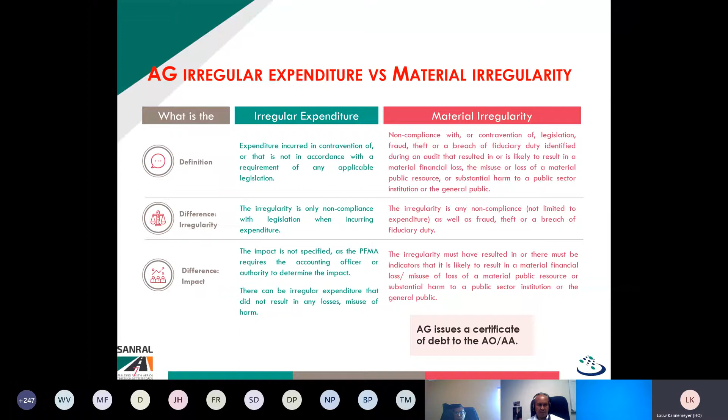If one looks at the Auditor General's report on material irregularities, these are on audits done in 2018-19. We don't have the update for 19-20 because the audit period's been moved out by 2 months. If you look at here what the Auditor General regarded as material irregularities, remember this is now where they are going to be issuing a certificate of debt where money needs to be collected from someone.

So just to show everyone what they regard as material irregularity, if you look here at the nature of material irregularities, of these 28 material irregularities that they identified as Auditor General, 11 of the 28 was overpricing of goods and services procured. So if they decide that the price that was paid for goods and services was above the market rates as they may determine at the time, they regard it as material irregularity, because they say you should not have made an award if things were overpriced. And I think you see a lot of that with regard to the PPEs in the news.

Secondly, another reason, according to them, for material irregularity is unfair procurement processes resulting in a supplier appointed that did not deliver. So if you appoint a service provider and he in the end is not capable of delivering, they do regard that as a material irregularity.

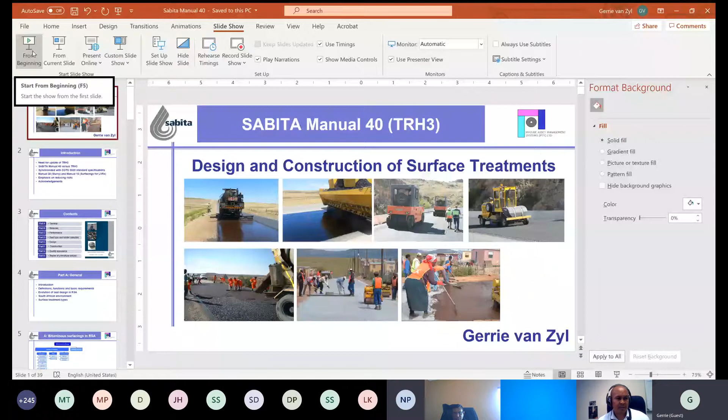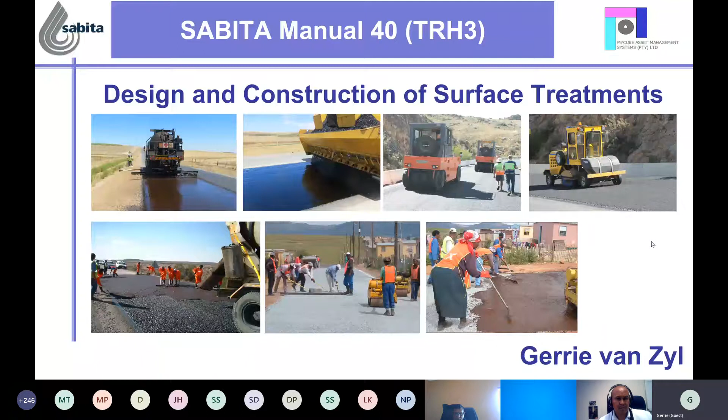This is about Sabita Manual 40. Not replacing TRH3, but one can almost say so. There was really a need to update the TRH3 2007. It's 13 years old, and a lot of things happened in between. So Sabita came to the rescue and decided they're going to sponsor that. What I can say, it's synchronized with COTO 2020. The standard specifications incorporated in this document are Manual 28, the slurry, and Manual 10, surfacings for low volume roads. And the emphasis is really on reducing the risks.

And can I acknowledge Sabita for sponsoring this, but also all the people who actually contributed, and really good criticism, and it made the document a lot better. It was ready, but a meeting a week or two ago decided that we need a little bit extra on the PG binders. So I'm just going to run through the contents and then highlight a couple of things. It's now divided into 8 parts: general, materials, performance, seal type and binder selection, design, construction, quality assurance, and the repair of premature failures.

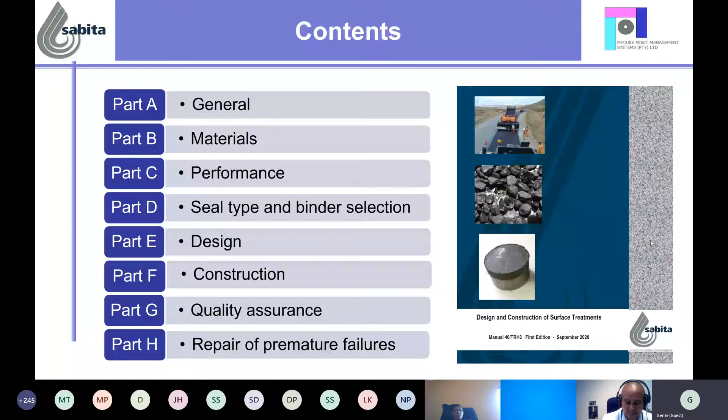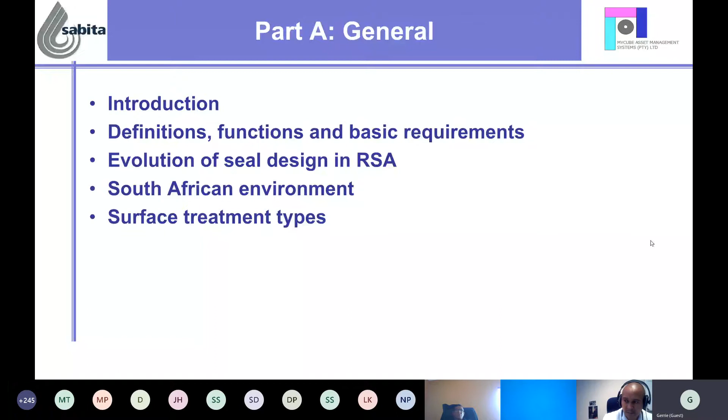Just highlighting then Part A: definitions, the functions, the evolution of seal design in South Africa, our environment, and the different surface types. So we're talking about surface treatment here, not the asphalt side, and sprayed seals, slurry, and combination seals like the Cape seal and the slurry-bound Macadam seal. The graded aggregate seals, like the Otta seals, are also dealt with in this document.

In the definitions, we look at skid resistance, the macro texture, micro texture, road noise, typical values for different seal types, and, let's say, investigatory levels of when you need to do something. This is just about where things came from in South Africa.

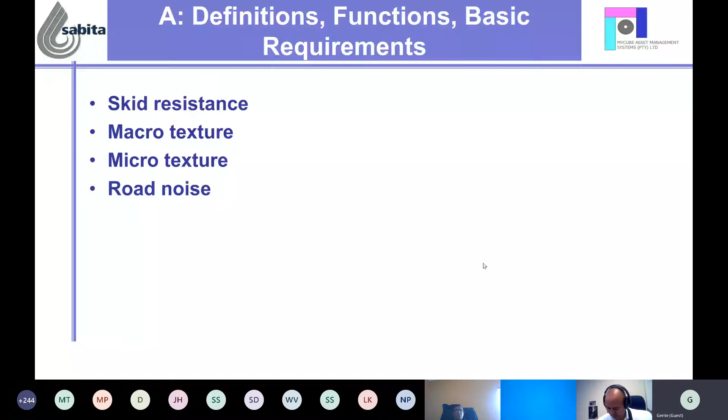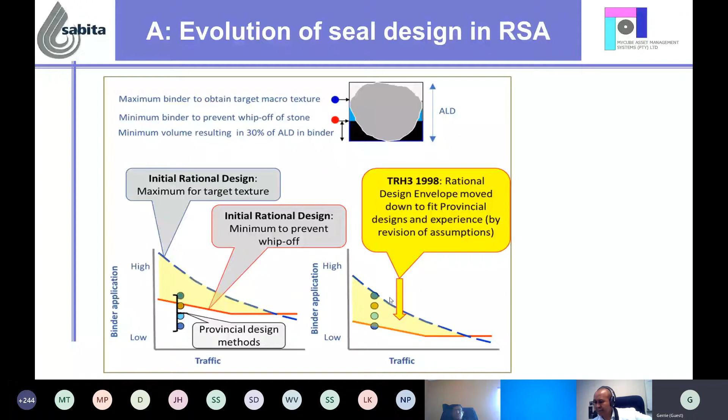Quick view on that. The initial designs from different road authorities in South Africa, actually everybody believed they were right, and then the rational design came up, and it provided too high answers, too high application rates. So in 1998, what we did was to change the assumptions of the rational design method to move this whole envelope over so that all the road authorities should more or less get the same answers and be happy with it.

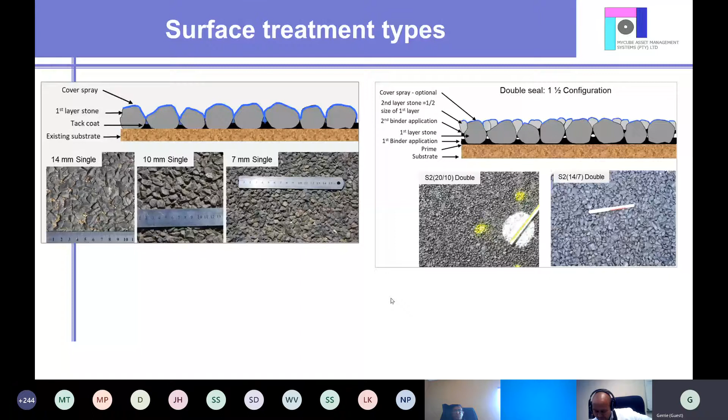Just highlighted the different seal types that we're looking at: grit seals, double sand seals, Otta seals. On the right hand side, the graded aggregate seals, single seals, double seals with different configurations, 1.5 and 1 1/3, and so forth. And every seal type's got a place in our industry. There's the Cape seal, slurry-bound Macadam seals. So all of them are dealt with in this document.

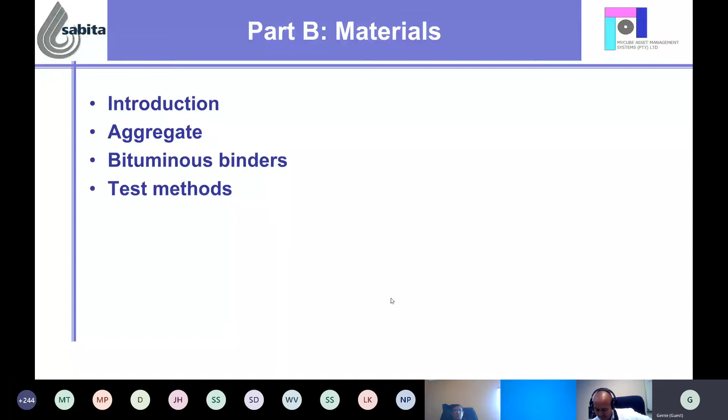On the material side, it's really digging into the depth of the aggregate and specifications and what we really want, the bitumen binders and test methods. Just to highlight here that in line with the new COTO specifications, there are three categories of materials, and it's not specified for the different traffic volumes, but one can reduce certain standards when you deal with lower traffic volumes.

And that's not thumbsuck, it came from a lot of research and from other organizations and countries over the world. So there's some reduction in the standards so that you can use materials locally available for specific purposes. On the binder side, we stick to SANS 4001 and the TG1 document for the modified binders, but we also need to move to the PG binder specifications.

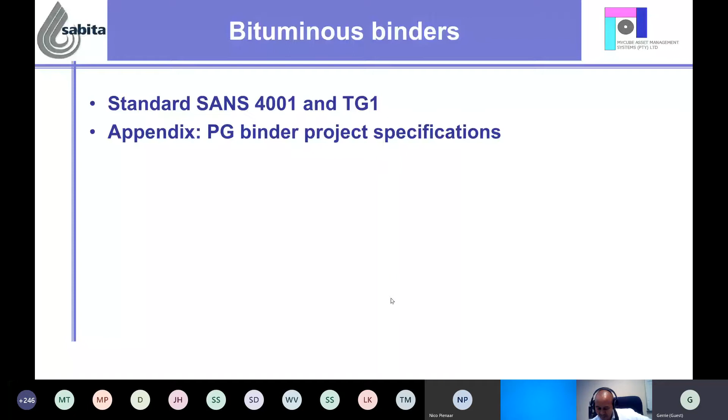We had a meeting two weeks ago, almost launched the Sabita Manual 40, and then it was decided that we need to bring in the PG binder project specifications. Not completely blind specifications, let's say half blind, because with Stephen Renon's assistance, we'll add project specifications so that there's a PG binder specification, but on top of that, for a bitumen rubber, for example, you will still specify bitumen rubber with the properties of the material you want to use in this binder.

Part C, performance, quite an important one, dealing with how different factors influence seal performance: the pavement structure, the traffic, the geometry, design, aggregate, and so forth. All those are quite important to understand, to select the seal type and the binder type, to do the right design, and how you actually construct for good performance.

Just some highlights to understand the effect of moisture in terms of performance. Moisture just underneath the seal layer can actually change the deflection bowl completely. If you have a very soft layer just under the seal, and when it's wet, you will have a very short radius of curvature, and that will make the seal crack immediately. And if that base can dry out, then you have a very large radius of curvature, which means that seal can last very long.

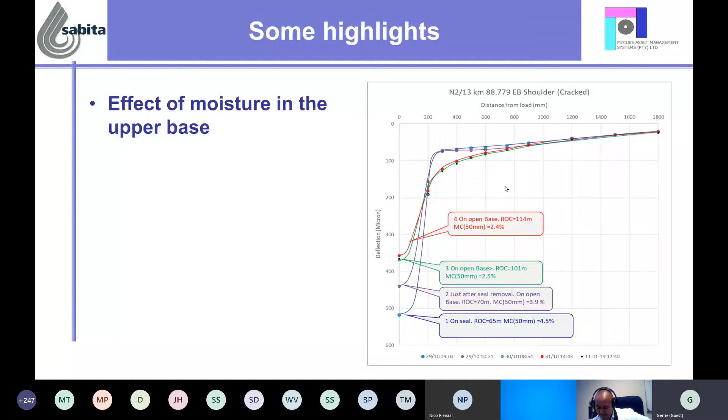That's also in line with other documentation. But what it ties into is our specifications in terms of drying out a base layer before we seal, and it all starts to make sense. Other highlights: we've had several investigations of seal failures, and one of the main reasons was, in fact, too coarse base textures, the G1 and G2 crushed stone materials.

And as you can see here, the base layer, the large aggregate, actually protrudes, and it's right at the surface, something like that, and at the bottom is the result of that, with moisture penetration into it and stripping of the seal. So we had never really had good specifications. There are now new guidelines for maximum existing textures allowed before you must put a texture treatment on, just to make sure that the seal performs well.

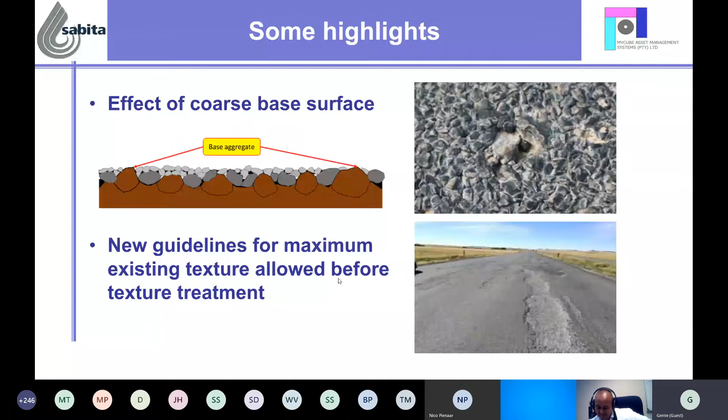Effect of rejuvenators. Research work shows that if you apply a rejuvenator, like our inverted cutback emulsions, or even an anionic stable grade diluted emulsion, you can extend the surface life for up to 4 years. And there's a CRT, a crack retardation factor, that you can use in the HDM-4 modeling and performance.

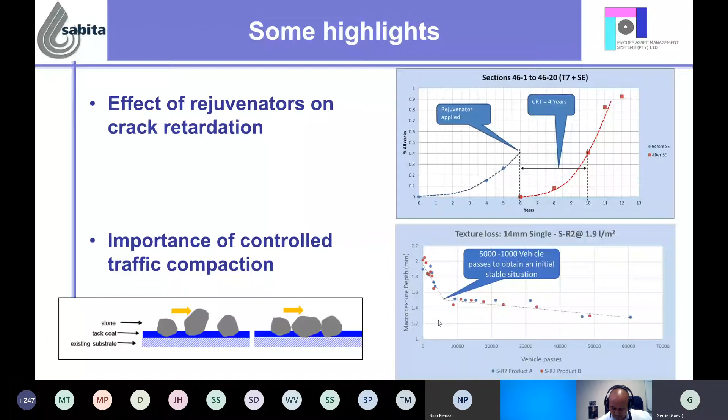Just part D then, seal and binder selection. Different aspects are covered in this chapter. There are specific guidelines for inexperienced contractors, temporary surfacing, sealing through winter, labor enhanced construction, small airports, game parks, forestry roads, footways, and so on.

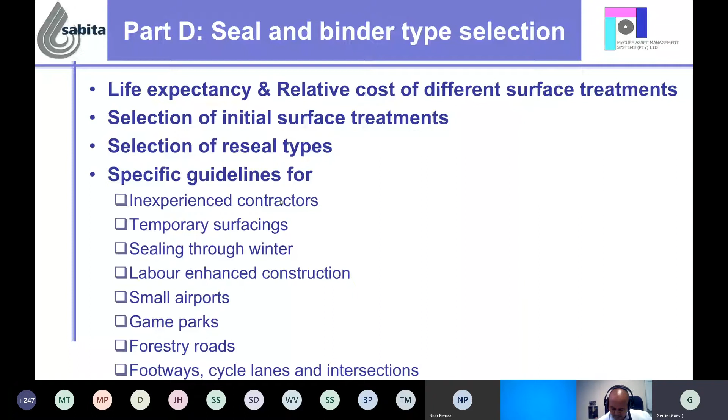And highlighting certain things like the timing of when you must seal. Often we need to identify it at an early stage, so we do the work at the right time, because we still need time to program a budget, award the tenders and get onto site. And what's the implication if we don't do it in time? It can cost up to 18 times the cost of sealing at the right time; it takes a nosedive and we end up rehabilitating the road.

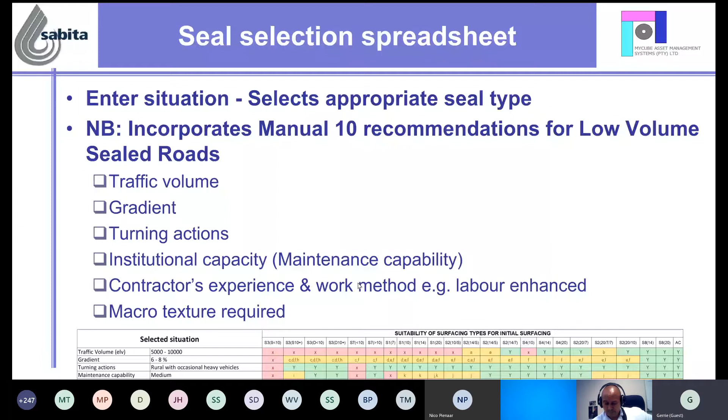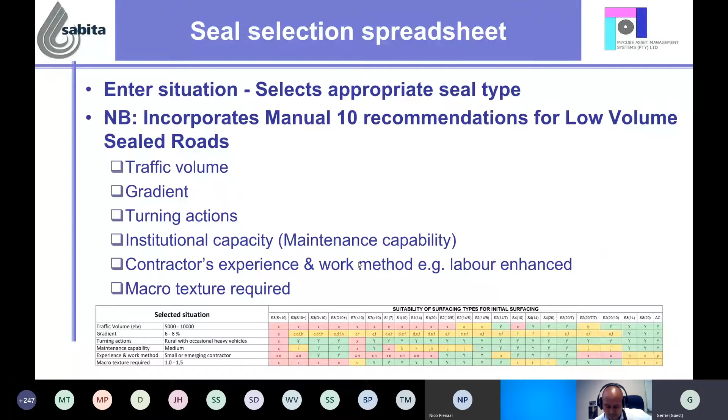For seal selection, there's a spreadsheet available to download where you enter your own situation. It incorporates all the recommendations and studies we've done for Sabita Manual 12 and Manual 10. You enter your traffic volume, gradients, turning actions, whether there's maintenance capability within the organization, the contractor's experience, whether you must do labor enhanced work, and the macro texture, and at the end it will give you guidance with a lot of extras on what to be careful of and what can work in specific situations.

And what I want to highlight here is perhaps, Mr. Chairman, that one should consider for some of the next RPFs looking at low volume sealed roads and the importance of that, and where are the pitfalls and what we must do. We have many experiences and situations already in South Africa where it was done. Excellent work.

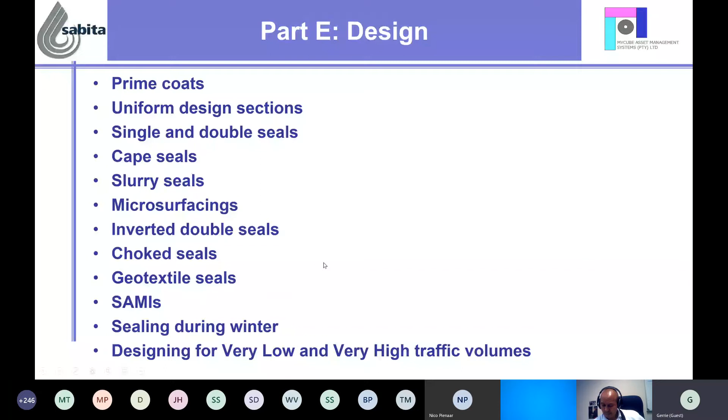When we get to Part E, design, we look at several different situations and the particular type of seal design for every one of these different types of seal and guidelines regarding that. And particularly where people make errors in interpretation of test results, like the ball penetration testing. Laboratories go out, they do the ball penetration testing, they come back and people just plug those values in.

And one must be very careful of what is really happening. What are you really testing? Is the stone that you're going to put on top going to penetrate or not? And how do you deal with the existing macro texture? You actually need to take that into account. There are a lot of extra guidelines available now to say, will the stone bridge, or will it actually fall in between, and how much extra binder must I spray for that?

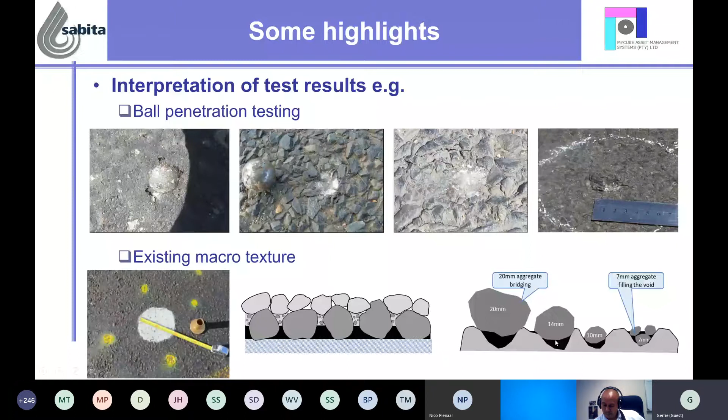Then the designs are now completely based on volumetric design. No more graphs that you have to read off, and all the principles of filling the voids are in there, making provision also for those softer stones that will have more wear. All the calculations are in the document, and there are tables where you can check if your little spreadsheet is actually working well. Plus practical warnings for different situations.

If the substrate is too soft, then the stone will penetrate too much. And if you put too much binder in, the binder will flush up and you won't get the macro texture that you require. Adjustments and conversions, guidelines on when you should take it into account and when not, and how. And then the conversion for the modified binders: as we showed, bitumen rubber doesn't orientate that quickly, so we need a lot more binder to hold that stone. It's not going to lie flat with maximum area in contact with the binder.

There's still current research on the go to test different binders and evaluate their rheological properties and relate that to the sensitivity to orientation. So one nice thing about the Sabita manual, we can plug out and plug in when information becomes available, and we can update the document.

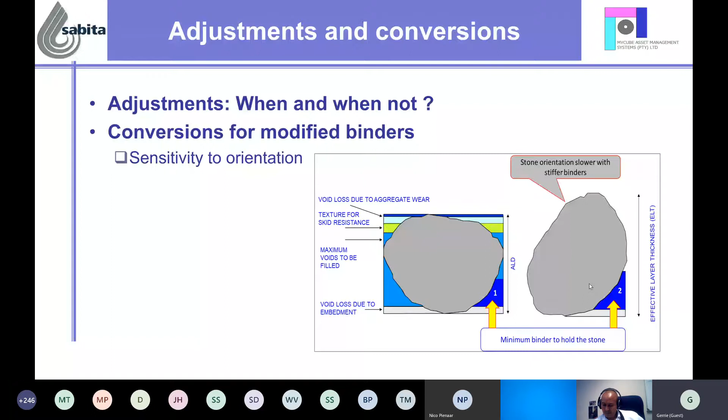Slurry design, you will see there's some general trend. There's much more information available to guide for different purposes. And you will see there's a little bit of an increase in the binder content of the slurries. One of the main reasons came back from many situations of testing and failure, where people put too little binder in, and the slurry becomes dry and brittle, and ravels or cracks easily. All the research over the past 10 years, we've tried to incorporate.

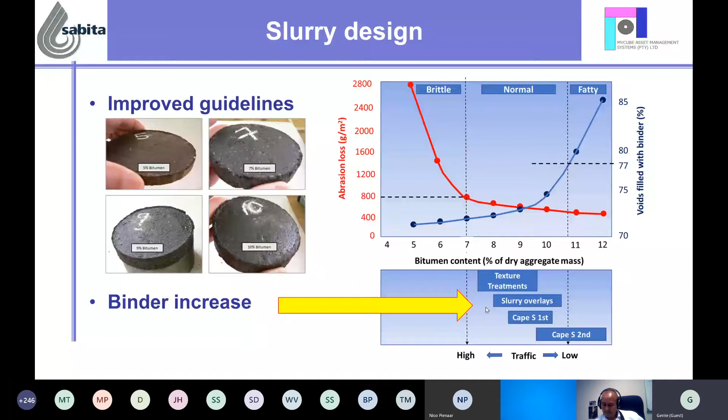Construction, dealing with many different aspects, and also guidelines specific to different types of seals. Not going to go into too much detail on that, but some highlights.

We've spoken previously about tram lining and the equipment certification, and we've recommended that we bring in the new SANS test for the spray bar distribution, because of certifying equipment before it goes to site, and how do we test it on site to make sure that we don't get this type of thing.

Now, can I say then the testing is being completed, and thanks, first of all, to people contributing from Spraypave, Colas, and specifically TOSAS, taking it a step further, understanding why we cannot just check one spray nozzle, and the variation in terms of the binder distribution, eventually getting to where we now test at least 3 nozzles at a time and getting very good results. So at the moment, they are assisting us to actually provide work drawings on the on-site equipment, so that the whole test can be finalized.

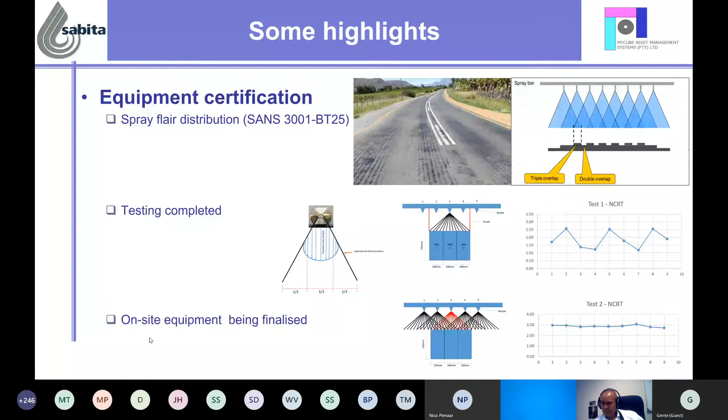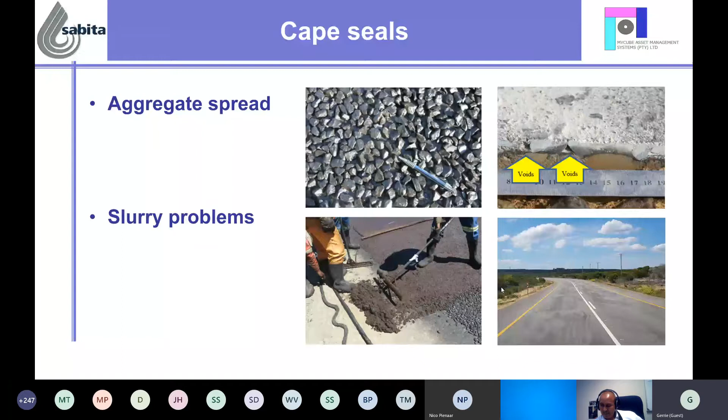A bit more on the Cape seals specifically, on how you should spread it. What are the errors that we get, like too tight chipping, slurry doesn't go in, makes voids, you get water in there, and the seal comes off. Other problems, specifically with the final layer of slurry being too coarse, and you end up with bad looking Cape seals. Things like putting wet sand in and wet emulsion, and you get corrugation effects like that. A lot of different things to highlight to make sure that you get it right.

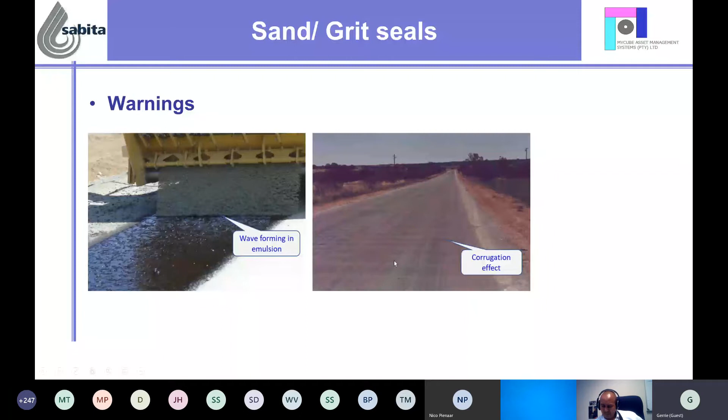On the quality assurance side, different aspects, how to deal with different forms of contract, the whole quality assurance process, the effect of the existing surface or new base, the quality of the construction plant, quality of materials, and then the construction itself. It's completely in line with the new COTO specification. A lot of different processes to guide you when to make a decision, when to reject, when to conditionally accept, and so on. For example, if this is a double seal with a cover spray specified, if you have underspray, to a certain extent you can still add a little bit more on your cover spray, but only up to a certain point. Those are guidelines in there.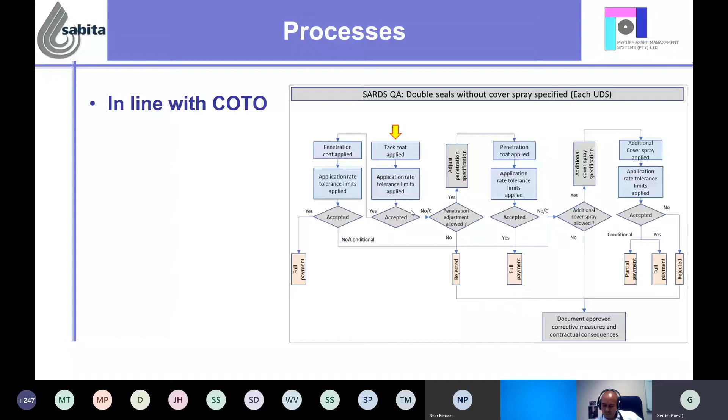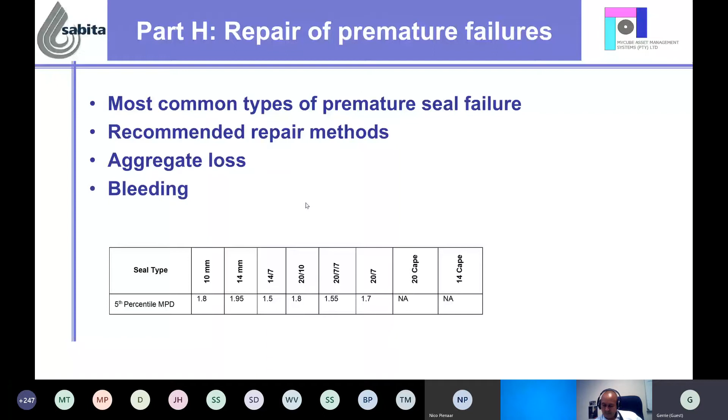There's also repair of premature failures, dealing with the most common types and recommended repair methods, and specific attention to aggregate loss and bleeding. I just put this little table in. We don't have really good specifications up to this point in terms of, when I seal, what must be the texture depth for a certain type of seal. So there are some guidelines in terms of what you would aim for with different seal types that we commonly use. And then some good experiences with different methods of dealing with aggregate loss.

There's an example of using a pre-coated 5mm grit seal, and then, with a fair bit of experimentation, guidelines in terms of different traffic volumes and cool or hot weather, how much you must actually spray when you use the pre-coated grit aggregate to repair those stripped areas. On the bleeding side, there are also different methods, and the one that's really recommended is the hydro cutter, what it looked like before and after, and what type of texture you would like at the end of the day.

So in summary, it gives us the current best practice, and this is a dynamic world. We get new binders, new additives, there's a big thing going on with adhesion agents at the moment, how they can help you immediately, but we're not necessarily sure about the consequences later on. Different types of adhesive agents, and the nano products coming in, things are going to change. The nice thing about the Sabita manual is that it allows regular updates. As soon as something comes up with better information, we plug out and we plug in.

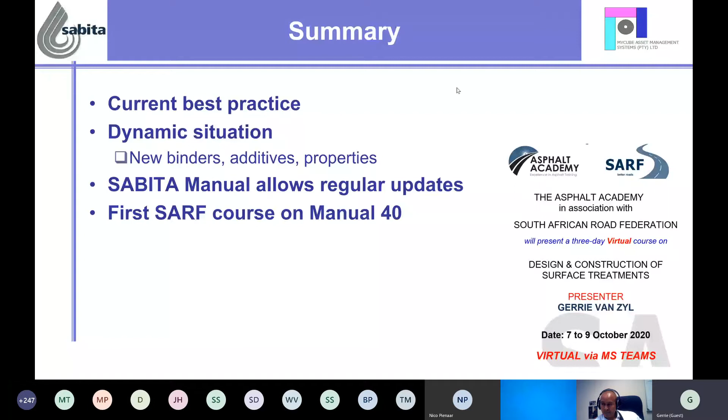Gerrie? Yes. For your presentation, well done. And to your sponsors, you've really got a beautiful presentation and you're really doing good work, you and your sponsors. I'm very impressed, and thanks for the work that you're doing. You guys are just champs out there. Thanks, Gerrie. Okay.

Again, sorry. Any questions? Or you can wait and attend the course in a couple of weeks' time. Thanks, Gerrie. Yeah, wouldn't understand half of what's going on, but anyway, that might be good to go on. Is there anybody that's got a burning question who wants to throw it at Gerrie? You may speak. Jan? Yeah, there's Soma and one other. Okay, Jan, go. Okay. Soma, you go then. Your question? Tim, I just want to find out how much thought is given to the design now of... We've got both on. Can we just go back to Jan? Jan, you kick off. You were first.

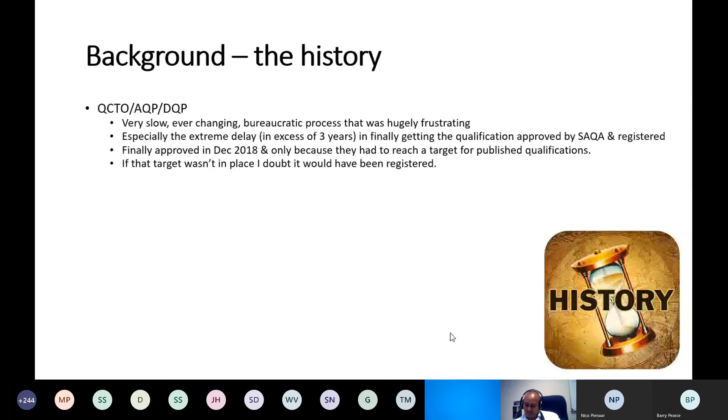At that point, or actually prior to that point, we'd already started having consultations with concerns around the applicability of the qualification for laboratory testers through the QCTO. The NLA had proposed that we move towards a process of deeming competent through an international standard, which is ISO 17024. We also agreed that it was possibly a bit of an overkill in doing the qualification with the extent of theoretical knowledge that we were trying to plug into the qualification as well.

The time that was going to be spent in these theory modules would have taken the candidates who are already in the laboratories out of the working environment, and that was perceived in some of the discussions with some of the laboratories as being too much time away from the workplace itself. And so the decision was to actually drop the qualification and to move to the certification of personnel.

The NLA proposed this, and we had a meeting with industry partners that included all the members from Mat Civils under the NLA subcommittee, as well as SANRAL, TCI, and ASPASA. And the idea is now we're moving away from the QCTO and putting it in the hands of industry to be run by industry for industry through the NLA SA. It's an independent, unbiased, broad-based laboratory organization, and I think it's maybe one of the better organizations that can actually run this. It's the same organization that is running the National Proficiency Testing Scheme, and I think that has actually been quite beneficial.

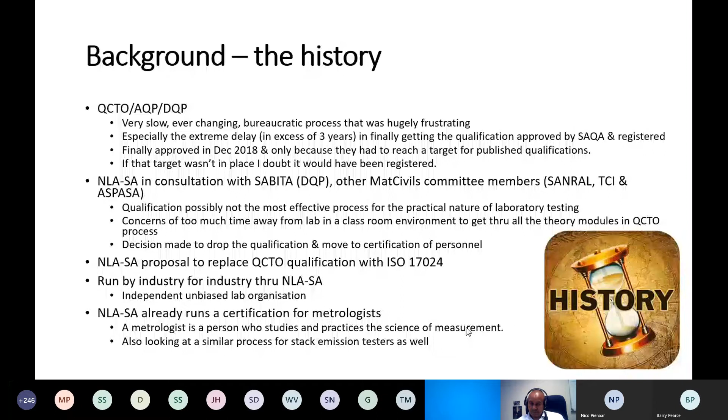Moving on to 17024, just a broad outline of what it actually is. It's a conformity assessment, and the idea would be that it's the general requirements for bodies operating certification of persons. That body would be the NLA. And it's the framework of that organization accredited to provide certification for personnel, that they are competent to produce a certain set of results from a particular test method or a range of test methods.

It's very similar to what the laboratories have got to put together under 17025. So they are registered, there are specific criteria that you need to conform to, to ensure that there's no bias, that the minimum requirements are actually achieved, etc. It's an international standard that has been developed with the objective of achieving and promoting a globally accepted benchmark for organizations that are operating certification of personnel.

And there are other very practical functions that are done under this type of certification. Typically, it would be things like roller operators, the guys who are operating the cranes on construction sites, that type of stuff. And my feeling is the civils laboratory tester who works at the bench itself is ideally suited for this type of certification.

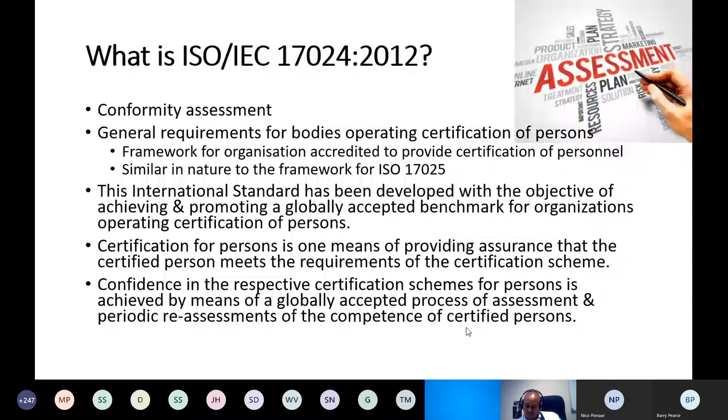If we have a look now at where we are with the COVID scenario and what it did for us, obviously there's a lot of negative sentiment around what happened around COVID with the closing down of industry, but from a positive perspective, it actually took us out of the industry environment and allowed us quite a bit of time to actually dedicate to putting together all the processes and logistics that are required in the 17024 requirement. As I said, it's basically the same as putting up a 17025 scenario, and you've got to jump through all those hoops and get everything in place to make sure that they're happy that your process is credit worthy.

Basically, setting up the process within the NLA to register as a SANAS accredited certification body and the deeming competent of the civils laboratory testers. A similar process, as I said, is in place for the metrologists. That is already up and running, although it's not certified as yet. And a similar thing is going to be in place for the stack emission testers as well. It's all under one roof, as I said. It'll be done by the NLA, so the process will be considered unbiased and independent.

So it's not done by an organization that has got a vested interest in a particular organization or organizations within the industry. They want to ensure that the folk who are testing within a MAT civil subcommittee environment are all competent to conduct the tests initially at a basic level, and that is obviously to international standards. It'll be the South African standards for testing, but the framework is the international standard that we're referring to.

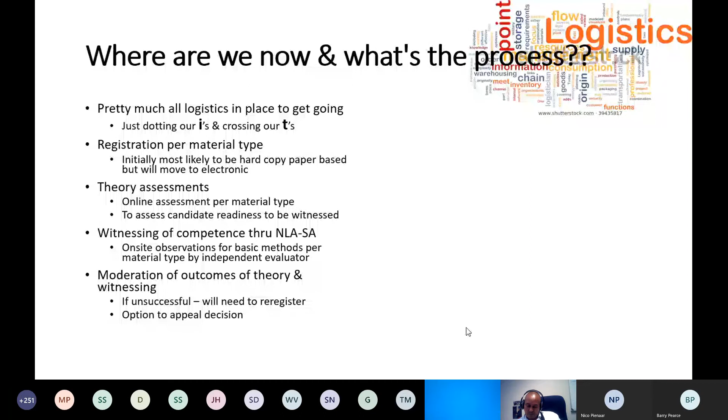The certification is then going to be approved and the certificate issued, and it is valid for a 5-year period, similar to what we have with the ECSA registration. After the 5-year period, we will look at reassessment, which I'll cover shortly, but all those that have been certified and those that are in the process of being certified will be accommodated on a database where folk will have access to see who's been registered for what particular process.

Reassessment, as I said, will be done after a 5-year period. It will require that the candidate is still actively working within the industry. There will be various applicable CPD type activities that they would need to have accomplished during the 5-year period.

And there will possibly be some form of online theory assessment as well that will need to be undertaken to account for any changes in the test methods, so that we ensure that the candidate that is continuing for another 5-year period has actually integrated any revisions to the methods that have taken place and is still up to date with the latest test method requirements.

We're looking at running a trial session as well to check the processes. There are SANS 3001 videos that we are currently in the process of developing as an in-house training aid, so that it will replace the current Sabita videos that exist at this particular point.

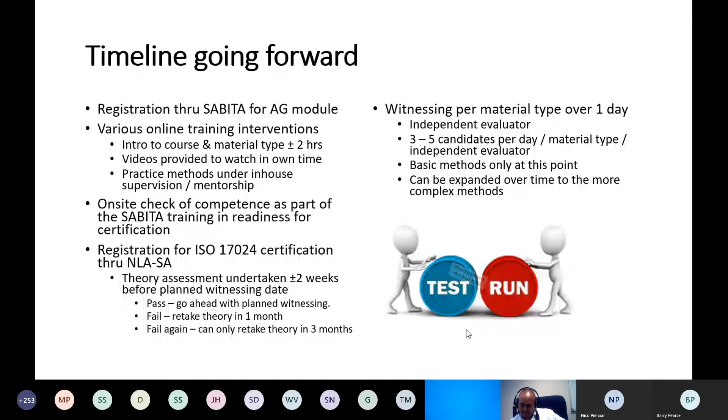It will be basic materials methods initially only, and we will look at expanding that into more complex ones later on as we roll out all the basic methods. The planning is that we will run this into the end of October, beginning of November. So during the month of October, the guys will be doing the initial training in-house with the AG methods based on the videos that are available and the interventions from Sabita's online training interventions.

And then into November, we would look at doing the actual registration for the NLA's certification process, run the theory online, and actually run the witnessing as well, and then have that in line before the end of this year. Going forward, once you've done the trial run or the test run, we need to evaluate what works and what doesn't work from a practical perspective and do any revisions to the framework that we have in place, both from the training side and for the certification process.

We will then open registration for industry for the aggregates methods, latest into early 2021, but we're hoping to have that open for registration into the end of 2020. We will then look at scheduling the witnessing of those candidates region for region and venue for venue. The venues that we have identified are the non-commercial environments, such as the provincial laboratories within the various provinces, that have those facilities available so that we don't disrupt production in the commercial facilities. With the laboratory coming up, there's a presentation later on with Wynand Steyn with regards to the facility in Pretoria, and that would be one of the areas where this type of evaluation will be taking place.

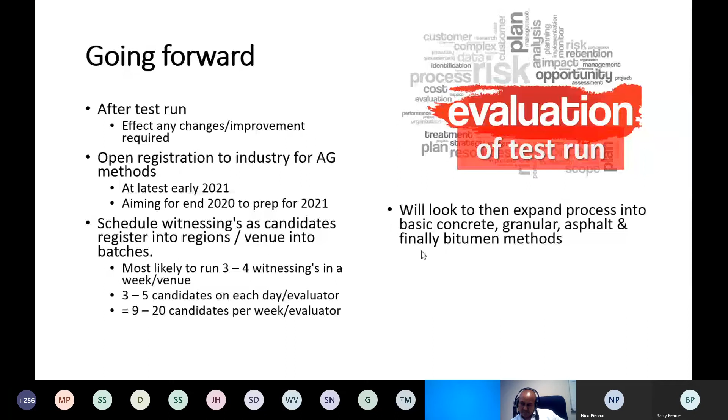So from my side, watch this space. Register your guys who need to go in for the process, get them certified and deemed competent, and we will get a competent registered bunch of laboratory testers certified as of the beginning of 2021 going into the future. Nico, from my side, that's where we are at the moment as a bird's eye view of the process that's required.

Thanks, Barry. There's one question from Eric. Maybe he should throw us the question and then you can answer it so we don't take too much time. Eric, are you ready? Yes, I am.

Barry, that looks very promising. Just a concern, though, it's not really to do with the testing itself. It's more our processes. Having the NLA as the sole provider, from our SCM processes, that's seen as uncompetitive, and they really don't like it. It's a bit of a struggle, so that's one issue. But also related to that, what is the possibility of some other organization coming forward and offering this competency training as well? I know eThekwini has trained a lot of staff along trade lines, and none of these staff have actually worked physically in that trade, and yet they've all got trade certificates.

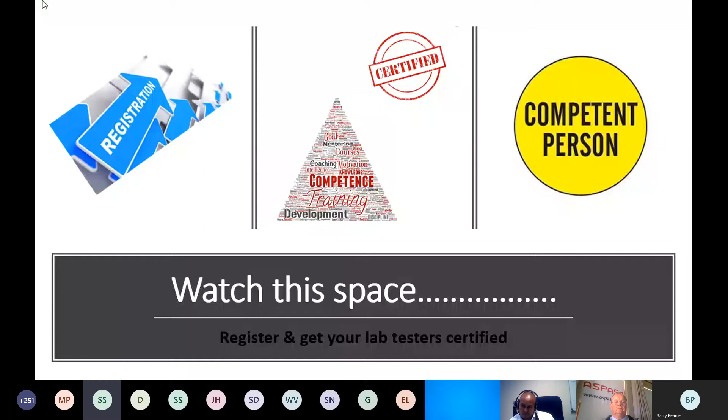Yes, ECSA is a statutory body, and this is not going to be a statutory body, but if we make it a contractual requirement for the person to be certified by an accredited certification body, then it is not a sole provider, it is a recognized body that you need to be certified by or belong to.

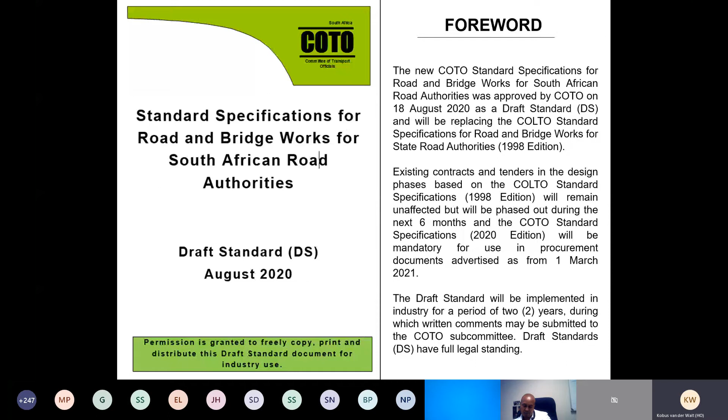That is on short notice perhaps, but it's important because the draft standard will be implemented for only a period of 2 years in terms of COTO's requirements, and during this period people can submit comments that will be included into the document before it becomes a final document. It's also important to note that the draft standard has full legal standing. Some people feel 6 months is too short, but it's important that we start using the document so that we can update or improve it as we continue.

The important thing to note is that this document is for the use of all authorities. In the past, the old COLTO was for state road authorities, and the whole idea with the new document was that SANRAL, the provinces, the municipalities, the metros, and others, including concession contracts, everybody in South Africa must start using this document so that industry knows everybody is working on the same standard specifications when they go out on tender.

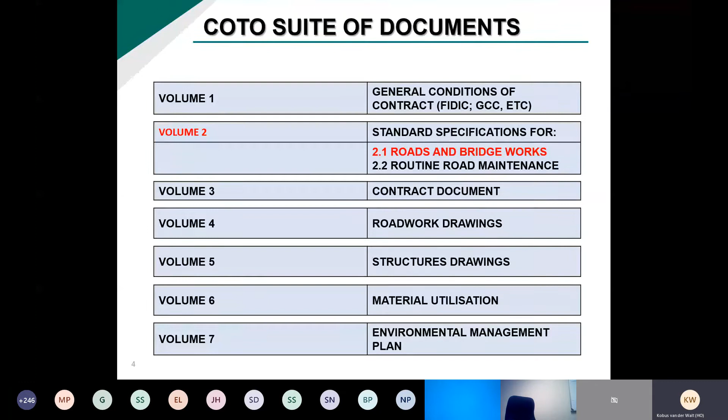This document consists of 20 chapters. You will see chapters 1 to 20, but it's important to note that chapters 15 to 19 are reserved for future use. There's a lot of things during perhaps the next 2 years that can happen, and we can perhaps put something in there.

And here I think of the issue of BIM that there's a lot of talk about in the industry, building information modeling as it's known, and perhaps the BIM construction model and standards can fit into 1 or 2 of these chapters. I think that's the future, and we'll have to make provision for that in our future documents.

Then on the chapters, all the chapters that I've shown you have got specific sections. There's always a part A, which is about the specifications. You've got a part B that deals with labor enhancement, part C with measurement and payment, and then part D with the guarantees and compliance certificates for each of the sections in this document.

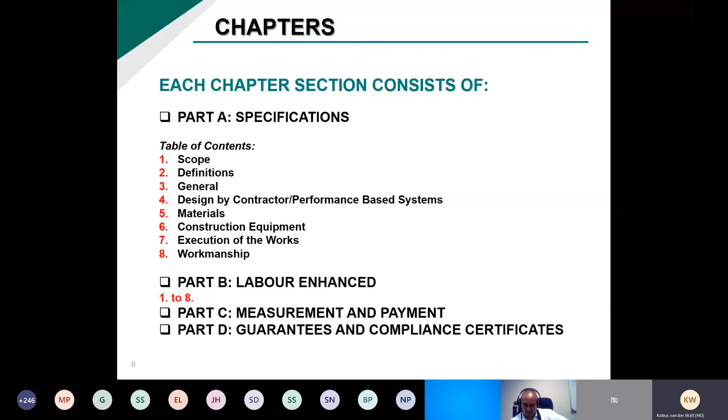Now, part B, labor enhancing: the definition of labor enhanced means to improve the scope for labor. That was the whole idea, that with this document we need to create job opportunities and, where we can, enhance the labor component of certain projects. Although a lot of work in the document already has a lot of labor involved, the idea was to see if one can still improve the scope of the labor component on our projects.

But one thing that I must tell you is that you cannot, at the end of the project, then think about the labor component. You must do that already during the design phase of your project when you want to increase the labor component. The specifications in Part A will apply for all work carried out using labor-enhanced construction methods unless some of the specifications in Part A are replaced with the revised specifications in Part B. It's important to note that.

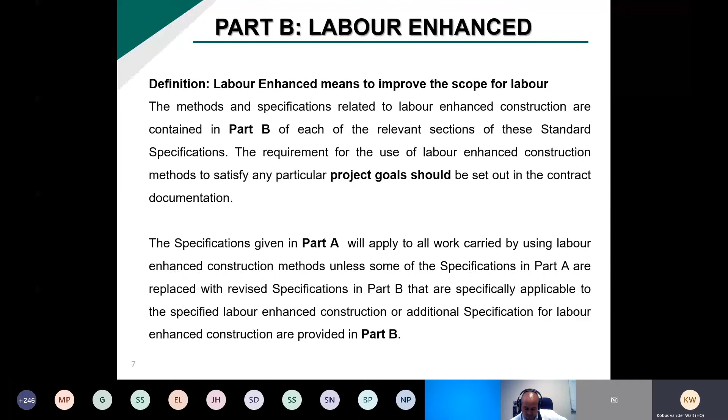Then, on the measurement and payment, we've already contacted the software developers of BIL. We have provided them with the information of the measurement and payment items in the COTO document, and they are busy updating the new COTO documents in the programs. I think the contractors and consultants will be happy to know that it will hopefully be available within the next 2 weeks from the software developers.

The next aspect is how you can get access to the document. SANRAL mentioned earlier this morning that we've updated our website a little bit. The draft standard chapters are available on the SANRAL website, www.nra.co.za, and can be accessed as follows: through the service provider section, then you go to manuals, policies, and technical specifications, and then to the COTO standard specifications, and you will get it there.

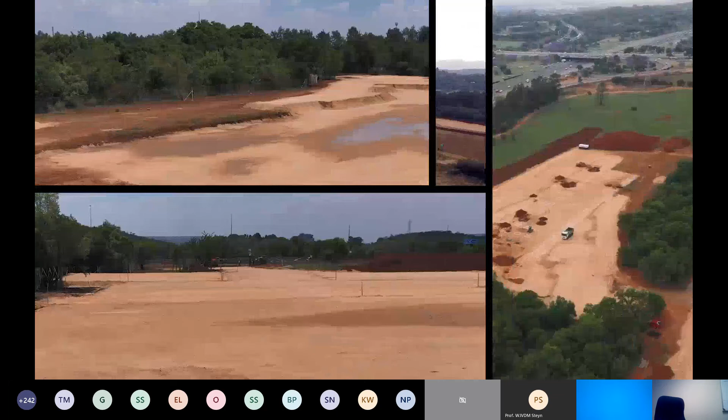Right. Now we're going to go to our last presenter, who's Wynand Steyn. Wynand, are you ready? Are you there? Hi, Nico. I am ready. I'm just starting up over here. Just pause that and share my screen with you. Let me just, there we are. Can I start when I'm ready? Yes, your presentation is not on yet, but it's coming, I think. There we are. Just give it a moment. It's loading, I think. Thanks, Wynand. It's got a white page, but maybe it's just loading. There we are, Wynand. Thanks a lot.

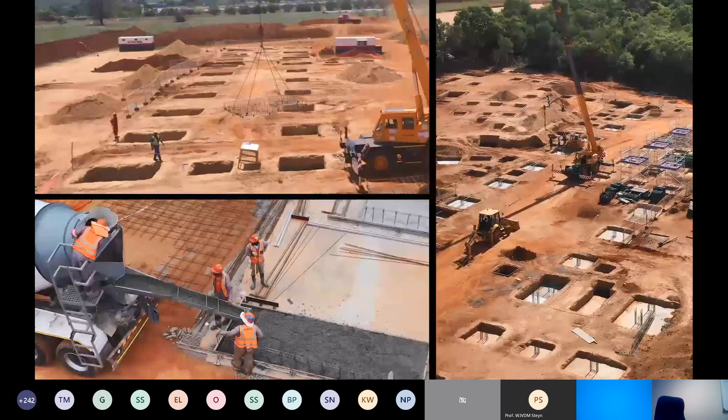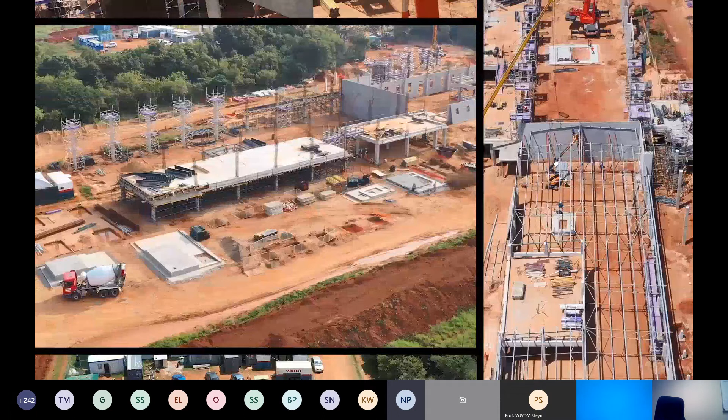It's dead quiet, Wynand. I'm trying to see what's the problem over here. Oh, sorry. I thought we had a cut or something. Nico, can you see it over there? Because it's showing on my second screen over here. Yes, it's showing 3 pictures, one with a ready mix and then a flat piece and another flat piece, but that's what we're seeing. So I'm not too sure what your presentation looks like. Maybe it's running. So, yes, there we are.

Wynand, are you talking or are you still battling to get it loaded? You did check it this morning. It's the video that's playing, Nico, but I think your bandwidth might be a bit slow for it. Yeah, because we've got 252 people on. Nico, it appears to me as if there's a bit of a bandwidth issue to play it to everybody together currently. I paused it right now.

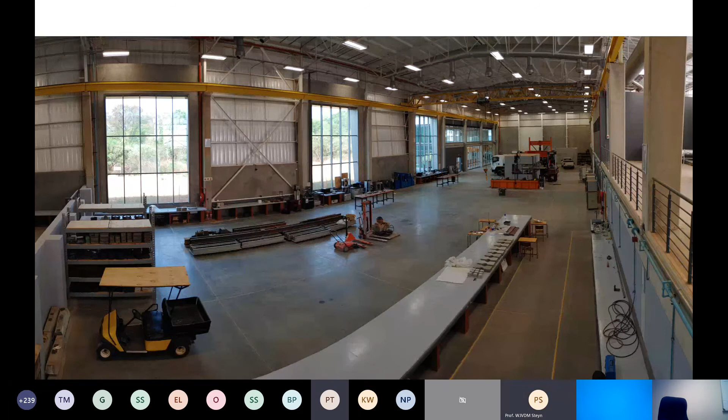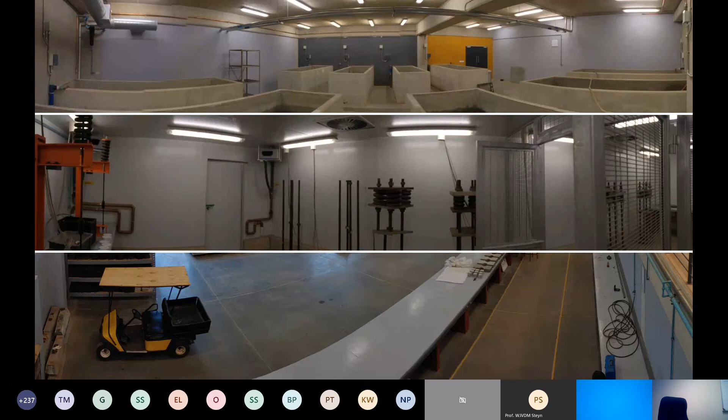I know the slides are moving, but we don't have any sound. Are you talking? I'm not sure what's happening. Slides are moving, or is it still loading or what?

Nico, it appears as if the video that's running is cutting off all other inputs from my side. So for some reason it doesn't pick up the video on your systems. It's picked up over here, but it doesn't show it. And I cannot do video or additional comments. I'm linking up in another system at this stage. Okay. Should we give you 2 or 3 minutes, and maybe people who want to run for a comfort break can do so? Let me do that.

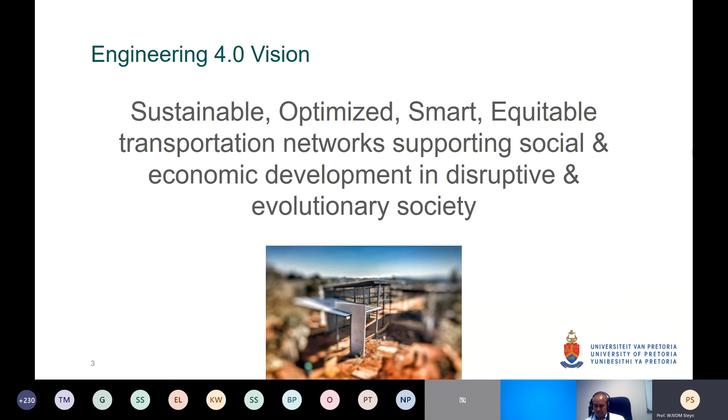The vision of Engineering 4.0 is to have a sustainable, optimized, smart, equitable transportation network that supports social and economic development in a disruptive and evolutionary society. The Innovation Africa at UP campus hosts Engineering 4.0. It is about 2.5 kilometers from the UP Hatfield campus and shares this campus with the Future Africa facility, with the N1 and N4, as well as the CSIR being neighbors.

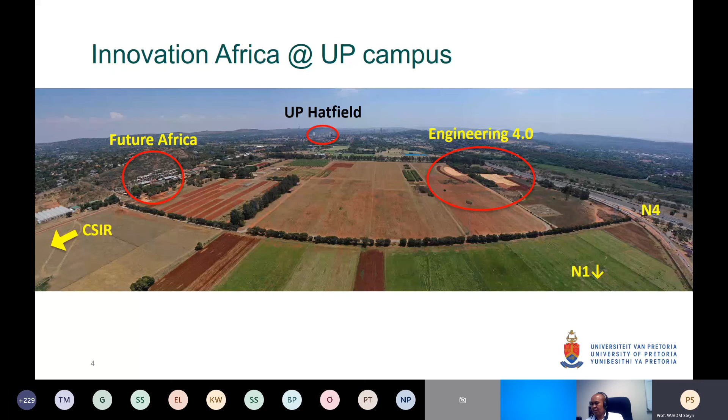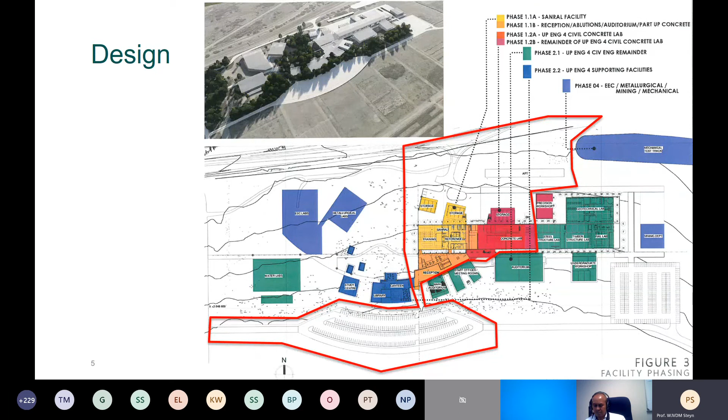The original design provides for a multi-phase approach, of which phase 1, which is currently completed, looks at the SANRAL training and reference laboratories, the concrete laboratory, the accelerated pavement testing track, and an active traffic lane on the highway. The training laboratory is a facility where we can train up to 20 sets of technicians or do their certification at any one stage. It's got a dedicated compaction area, as well as all the equipment that may be required to train and certify technicians and students in the standard laboratory testing methods.

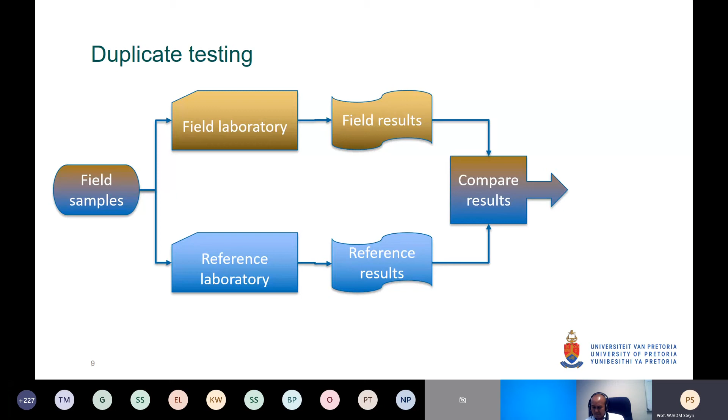The reference laboratory provides us with a facility to conduct duplicate testing of materials from our site. It's got a good reception area with storage for all of our standards, asphalt laboratory, bitumen laboratory, granular materials laboratory, and a stabilized materials laboratory. The concrete laboratory is the area where we do most of our undergraduate, postgraduate, and research work on concrete materials. It provides a large space where we've got a humidity room that can run up to 97% relative humidity at various temperatures, as well as a host of curing baths, not only for research samples, but also for various other testing regimes that we would like to operate from this facility.

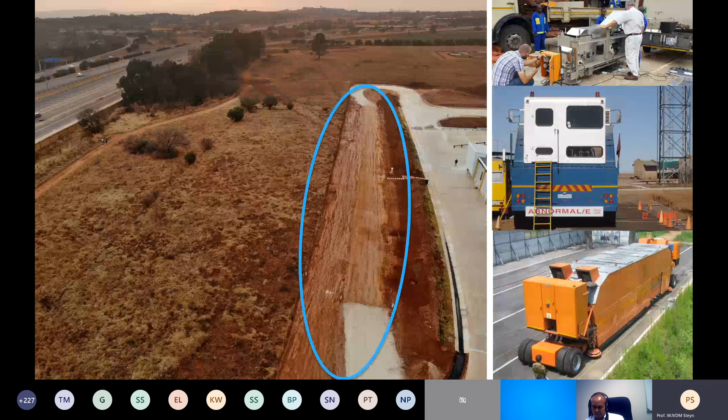We've got an APT track situated just north of the Engineering 4.0 facility. This APT track is 100 meters long and 6 meters wide and allows for the construction of various types of pavement structures for testing with any of the APT devices. The active traffic lane provides us with a unique facility where sensors can be installed inside, next to, and over the road, and we can monitor active real traffic as they travel along this portion of the highway. We have a data house situated right next to the highway, which provides us with the opportunity to observe traffic, do various types of measurements, and obtain information on vehicle pavement interaction. It is connected to our main fiber network.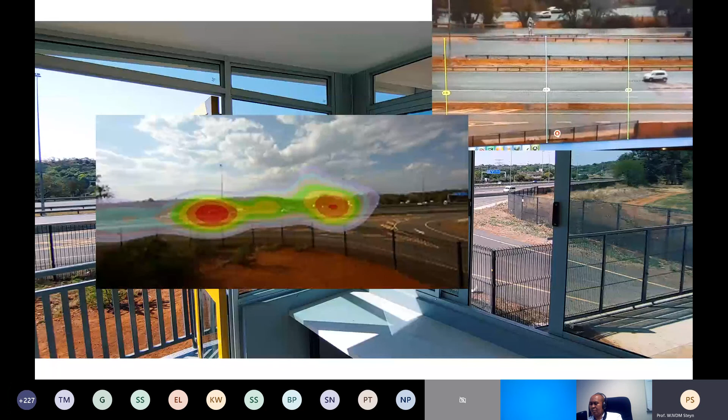Recently, we added the York Structural Timber Laboratory to Engineering 4.0. In this space, we will set up a range of timber research equipment to support this very important niche in our materials and construction area in civil engineering.